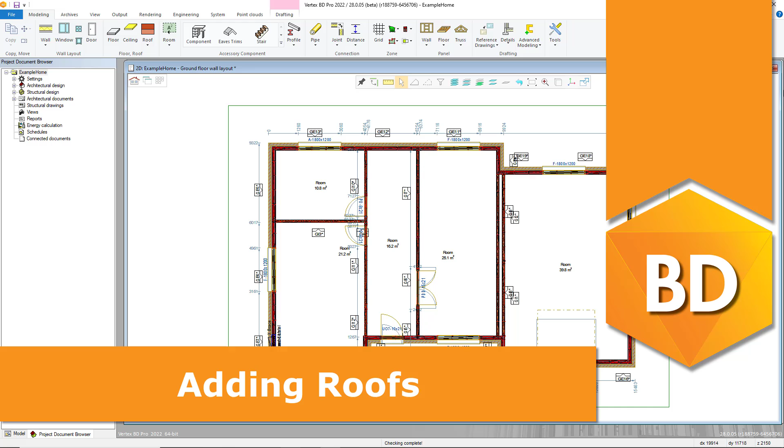Hello, thanks for joining us for our video on adding roofs within Vertex BD. This video will look at adding a simple hipped roof utilising the separate eave line. However, please see the next video in this series which focuses on the roof generator tool.

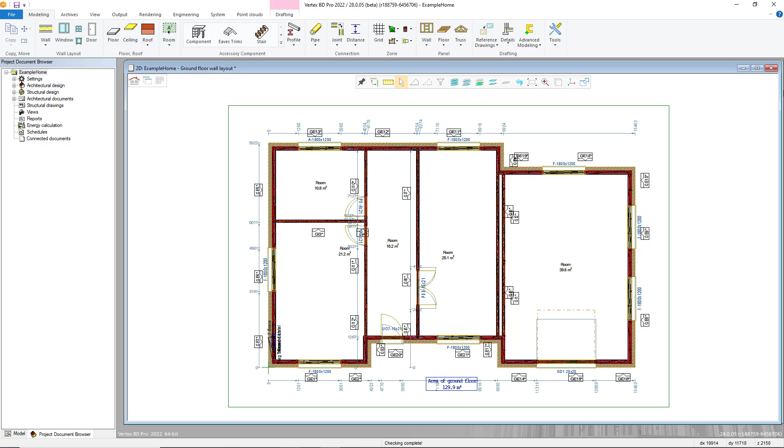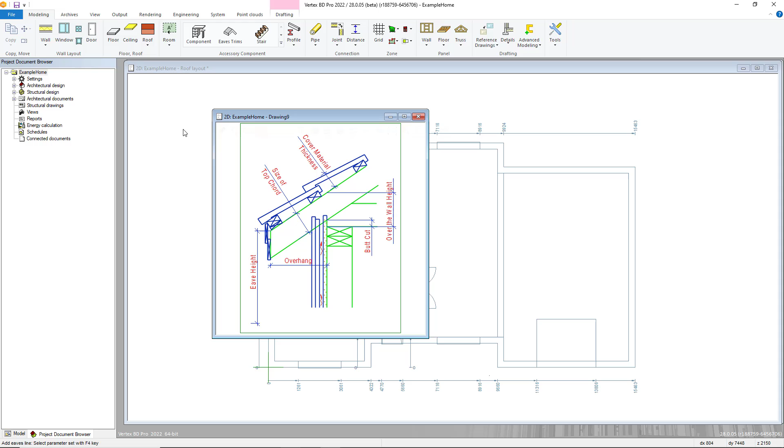Notice the options for the different roof types as well as quick options for roof overhangs displayed in the right contextual toolbar. In this example, we want a roof type for trusses, so hit this button to be taken to the parameters for that type. If the Help button is clicked, this brings up a helpful diagram for the different parameters.

First, select the material code, which will allow you to select a different roof type from the pre-existing library. This will automatically change the top chord field. Next, the pitch can be altered, making sure the value entered has a capital A suffix. Alternatively, you can enter this value as a ratio. Fascia height can also be changed to suit too.

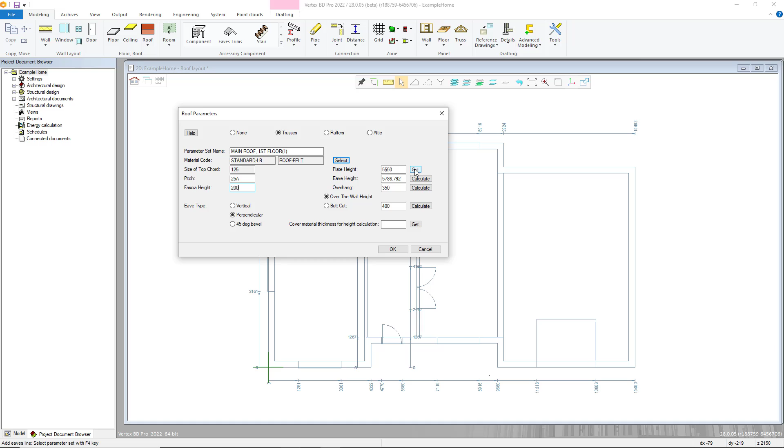Next, we can define the various height and overhang parameters. The first will be the top plate height that the roof will sit on. Either type this value in manually if known, or select the Get button to choose from the 2D or 3D models. It is easier to select from the 3D model. Simply select the wall and the plate height field will change accordingly.

Next, we have a set of 3 values which need defining before using the Calculate button on the third to define that value based on all the parameters of the roof. For instance, if an overhang value is defined here, and then an over the wall height value defined here, then press the Calculate next to the eave height field to obtain the correct value.

Once defined as required, click OK to begin adding the eave line. Here, simply hover near the external edge of the wall. Notice a diagonal line appears on the cursor. Click and add the line, then follow around the rest of the walls, adding the remaining lines to complete your roof as required, and confirming once selected.

The final step is to add the roof itself. Roof types are available from the Roofs menu in the Modelling tab. For the purpose of this tutorial, a hipped roof will be used. It's important to pick the roof's points in the correct order to ensure the ridgeline and pitch the correct direction. Now click the 3 points, confirming afterwards, and the roof slopes will be added.

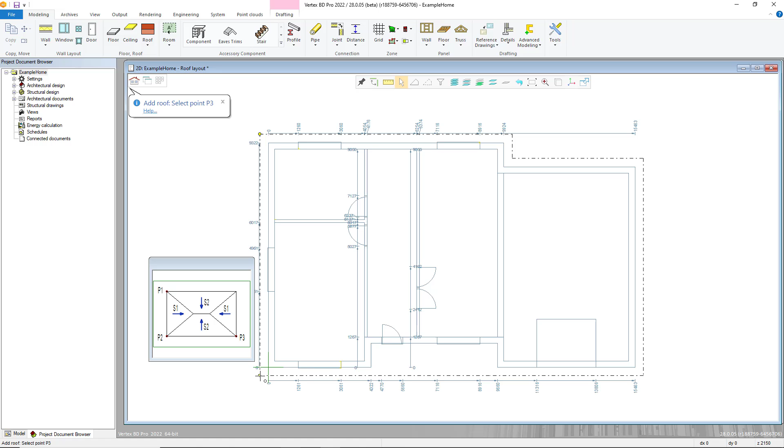This concludes our video guide on this method of adding roofs. Join us for our next video where we will take a look at the roof generation tool.